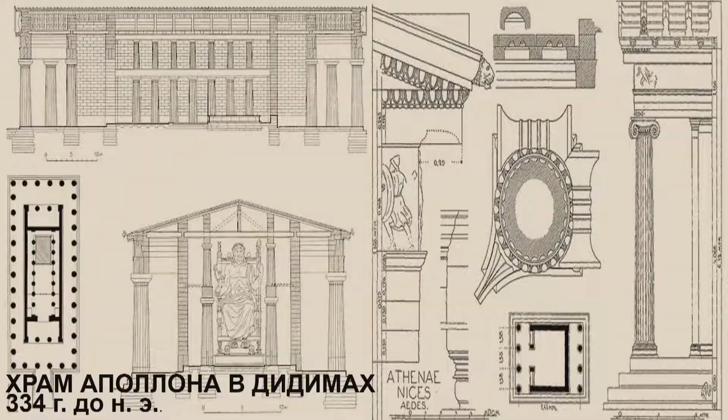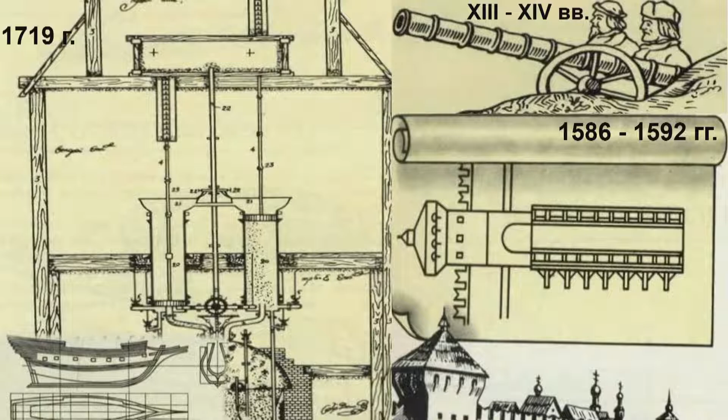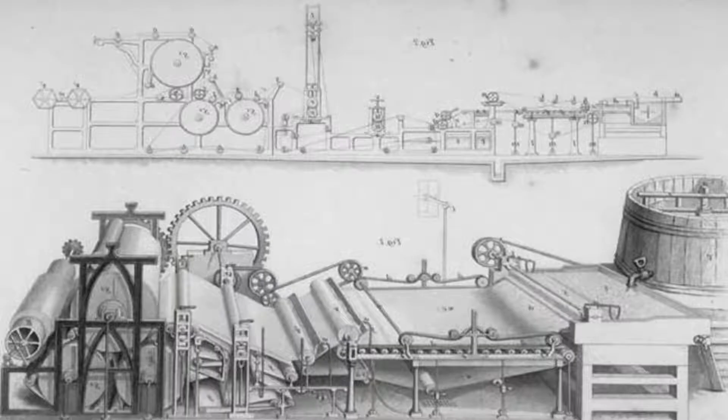But with time, the design documentation was getting more complex, and for the last maybe 500-600 years it hasn't changed much. We can see it's practically the same as our remote ancestors saw them: drawings, sketches, and supplementary documents.

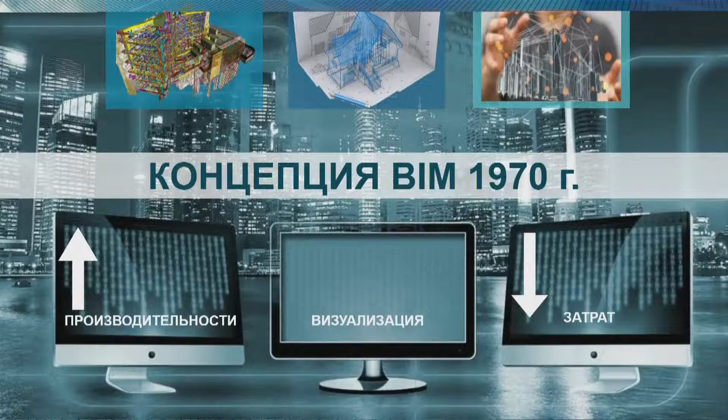So what's then? Construction requires improvement of efficiency. So then the following happened: digital means and computational means, new information mediums were appearing. Ideas popped up: how can we turn project documentation into digital form? And of course the best way would be to scan it, create images, and put it in some computer-based storage. But given all that, one should understand that for construction and design documents, relevant amendments and additions are necessary.

And the first concepts of information modeling started, they were called BIM, in Russian they're called TIM. Charles Eastman is considered to be the discoverer of those concepts. The first one is called BDS, and the other one is called GLIDE. What is the specific feature? Essentially, he took a model of structure building, and he thought: why not make it digital and complement it with various attributes, elements, and documentation?

And thereby we received BIM in its first trial version. Like I said, we needed increasing efficiency in construction because the customer needs the facilities cheaper and with better quality, and therefore it was required to do something about this digital model.

And the modern understanding of BIM has changed, under information modeling, because it's not a model which is implied now, because the model by itself has no advantages for the customers or contractors in construction. Now we understand by BIM the management of the entire project life cycle based on the information available. And of course better practice, better experience allows us to reduce the number of errors and save money for the contractor and customer.

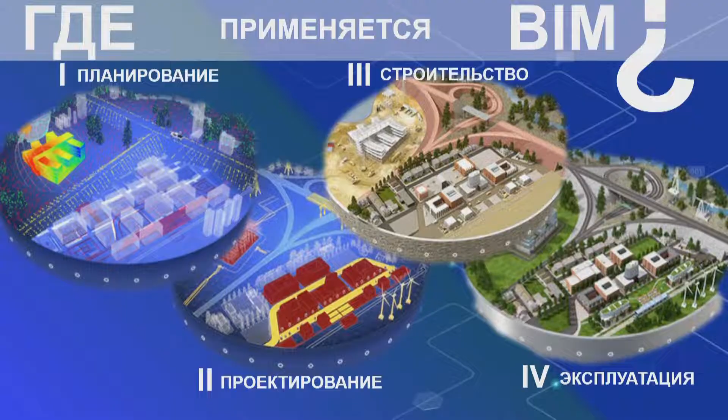And we see that the leading countries are currently developing technologies for information modeling in this or that way. There are leaders, some countries are catching up, and our country is one of the leaders. It's not a catching up country.

And it's not just separate tools, but in the first place it's a standard, because information modeling is a field of knowledge which is quite complex, and it requires a full description of the requirements and role models. And we have a situation whereby there are a lot of different things. We have upper-level standards, which have been described in the ISO 19650 family, but they are either very upper-level or very sector-specific for specific constructed facilities and types of them.

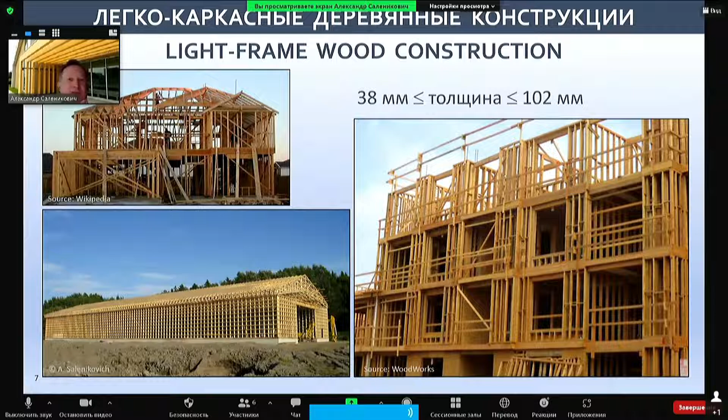Light framework wooden structures consist of materials with small cross sections. This kind of structure can catch fire if there is no fire protection. Also, beam timber constructions consist of beams 14 to 15 centimeters thick, or elements of larger cross sections — these structures are less vulnerable to catching fire.

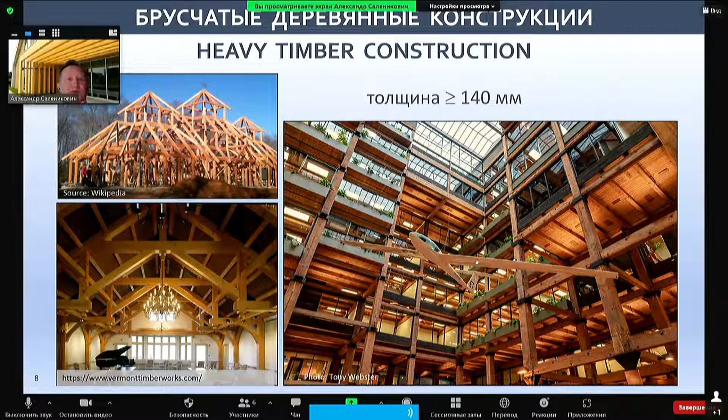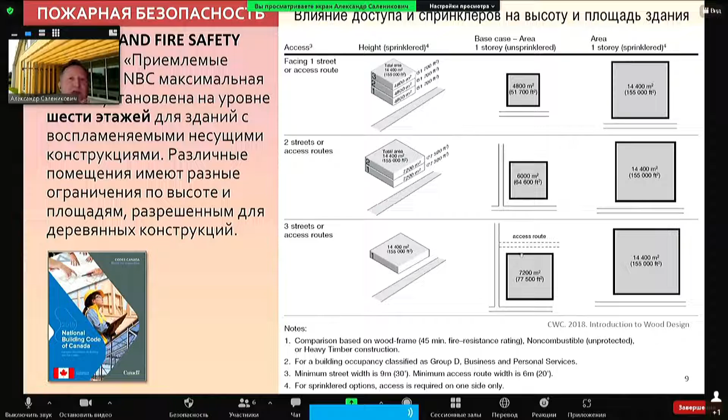Sometimes we see this term — hardly flammable timber construction buildings. But the height of these wooden buildings was limited to 4 stories, and only in 2015 did the number of stories increase to 6, also depending on access to the building — if there's more access from different parts, the height can increase.

Now there are construction code specifications published in Canada and the US that allow use of structural elements now called not beam but massive structures. Within the framework of this new classification in the American construction code, buildings up to 9 floors can be admitted.

For buildings up to 12 stories, as part of open walls, in case of full encapsulation of the wooden elements, the height can be 18 stories up to 82 meters high. As in Canada, you can see the height of the building is limited to 12 stories in case of complete encapsulation of the wooden elements.

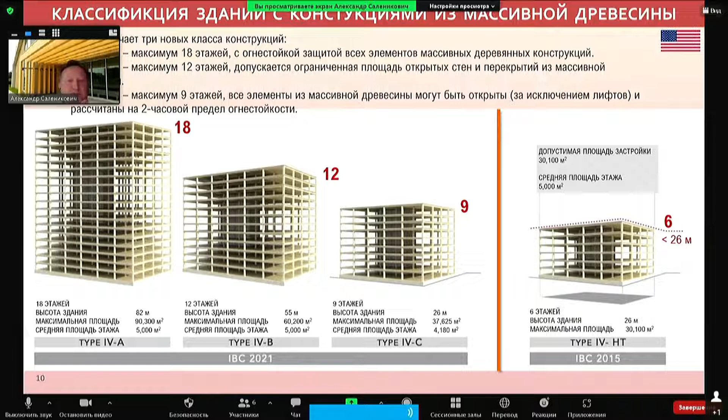A harmonization process is considered. What is massive timber? Let me show it in one slide. Some of them should be well known to you. So for the last 12 years, massive timber use has increased by 5 times in Canada. Canada now allows 1 million cubic meters of these kinds of products, and it's increasing annually.

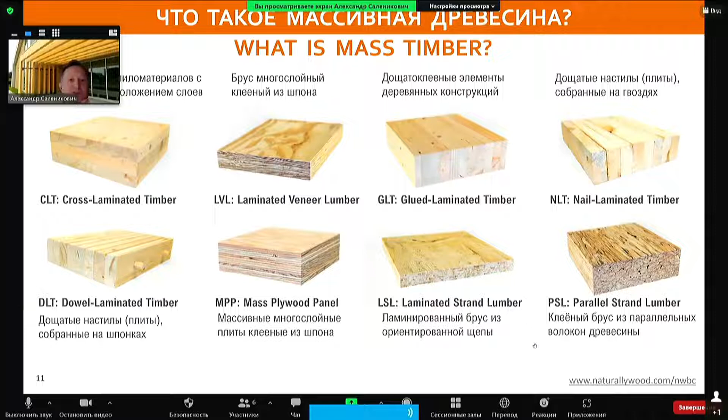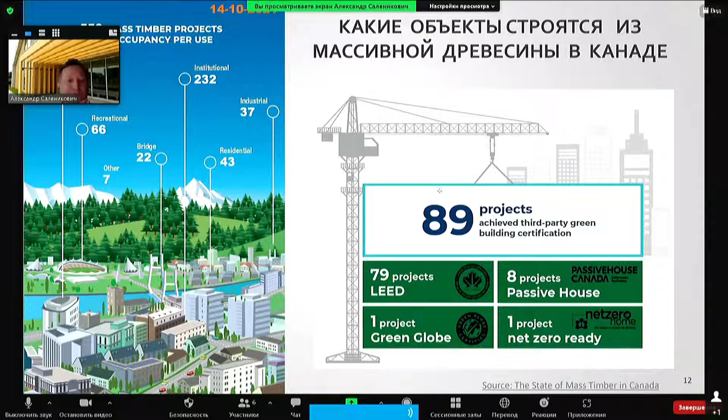It's massive timber, used in buildings of 550 sites, mostly office and commercial buildings. More and more school buildings, and also cultural and entertainment facilities, sports facilities, housing buildings, and bridges and other sites.

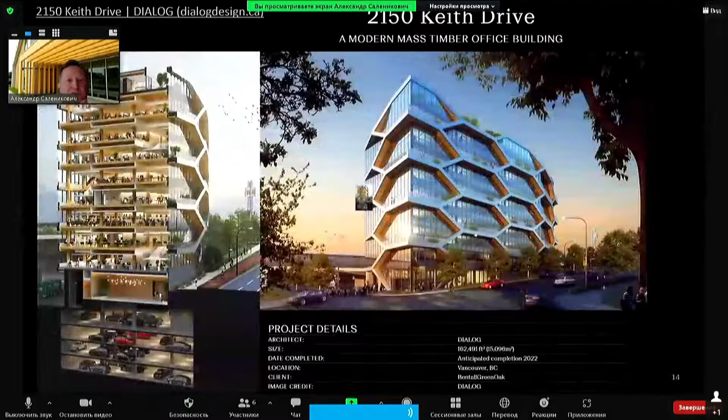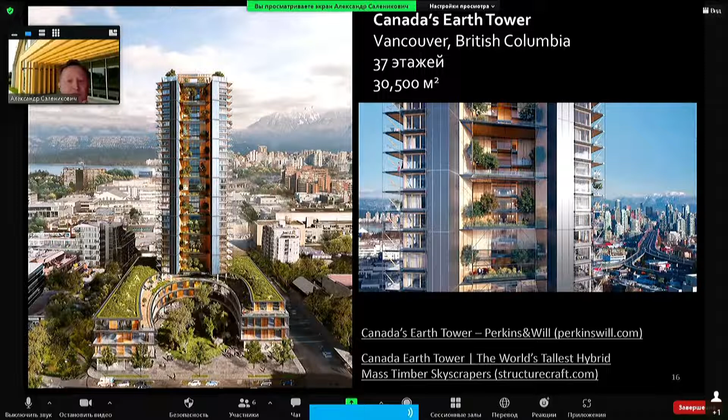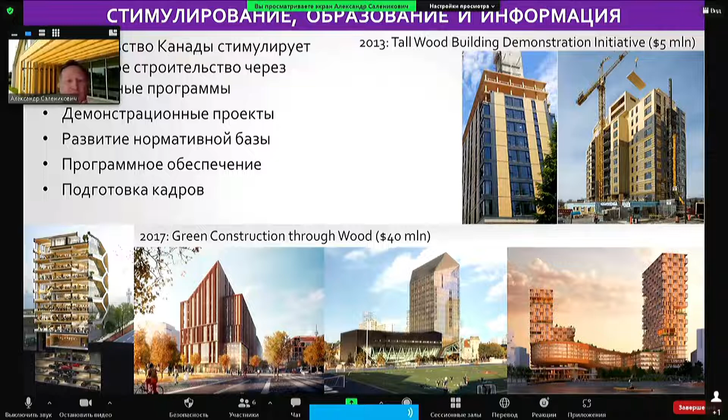Building the sites of informational systems and demonstration facilities. Now we are getting to an important point: how to use the experience that has been accumulated abroad and implement it in practice.

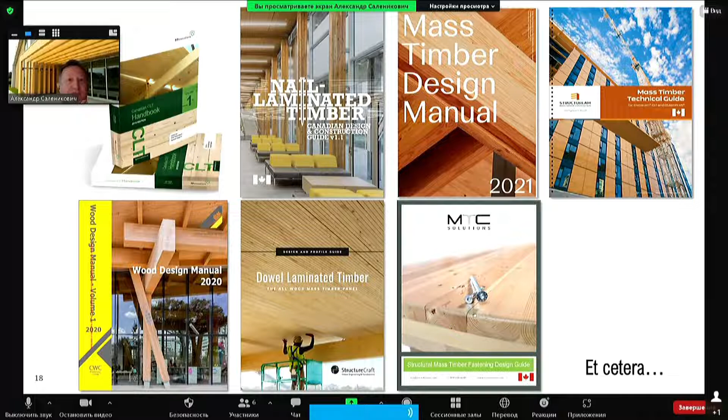A great role is played not only by translation of the text, but also the joint development of documentation. This international ISO organization is in place to help with this. There are 3 official languages for ISO: English, French, and Russian. The number of organizations is stated, and it is supposed to hear all the voices.

How is it implemented? We will give an example of how it goes in reality. It began last year in ISO 59 terminology work, where the first vocabulary was published. It was published in 2 languages, but it may not be the final version.

Why do I say this? Regarding the ISO directives, the actual goals of the organization state that each international standard should be the result of consensus that will meet global requirements. The standard has to be published in at least 2 languages, using the advantage of several languages, especially in practical standards.

Nevertheless, in a recent meeting with ISO Secretariat members, it was said that ISO management doesn't support, and is actually against, 3 languages in all standards because of commercial hardships.

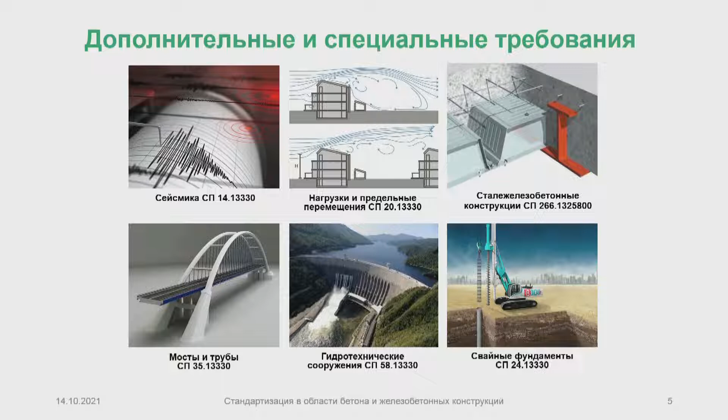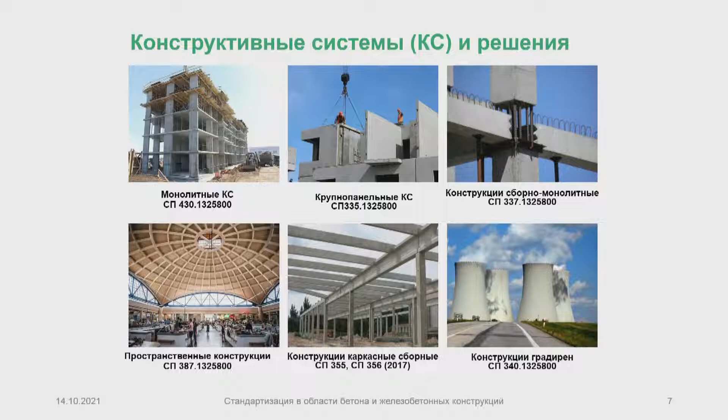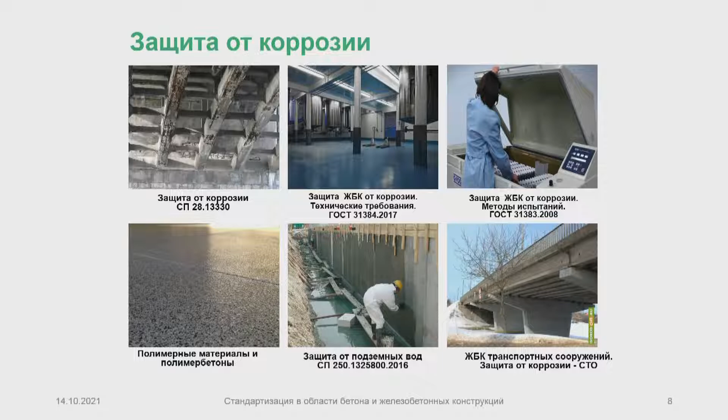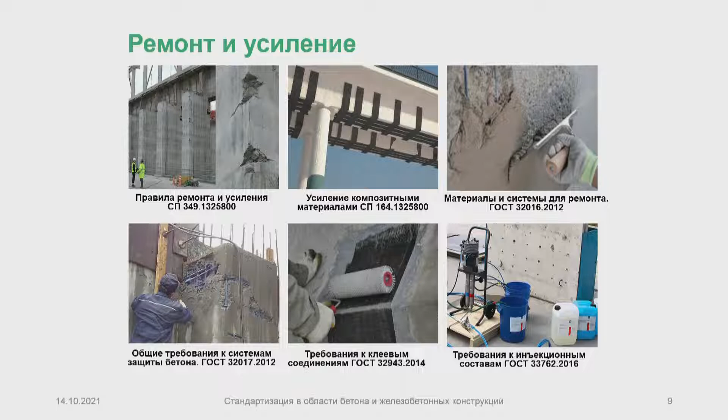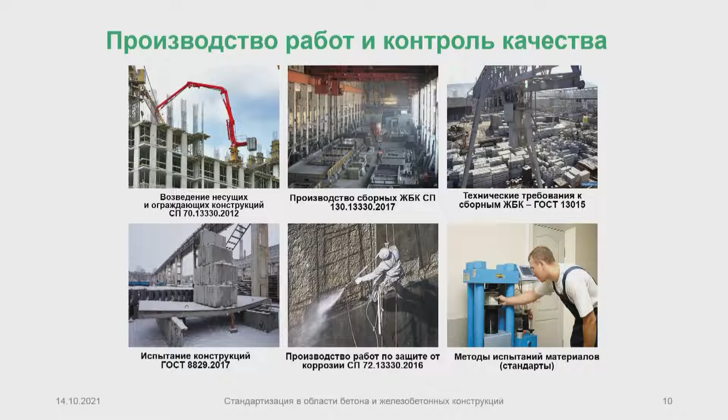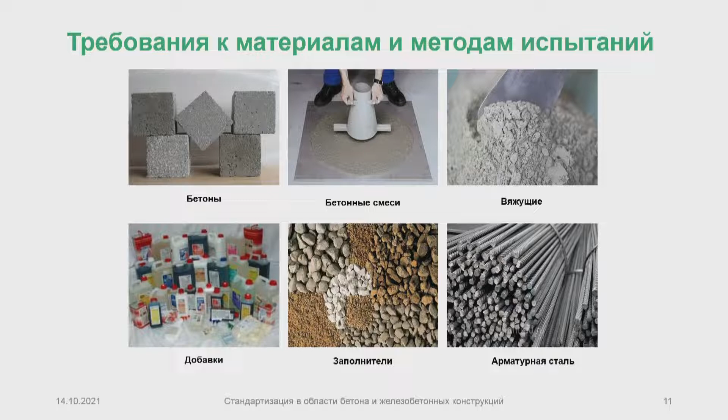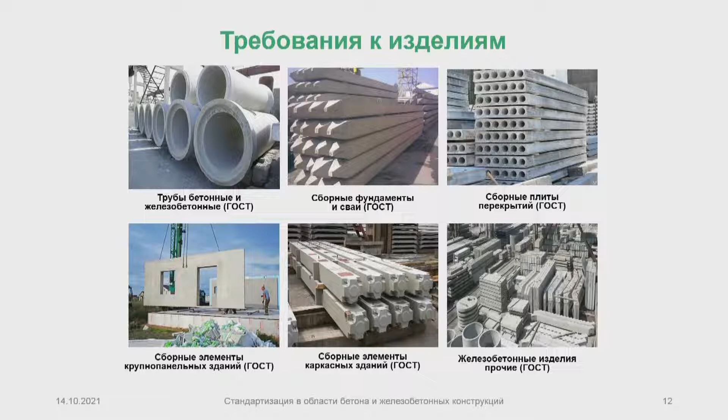I can separately consider a block on construction materials, and another block of national standards with requirements for materials test methods. We speak about concrete mixtures, its components, all kinds of fillers, also reinforcement steel. We've got all requirements for reinforced concrete, its pipes, slabs, and columns. There's a whole set of norm documents for concrete and reinforced concrete.

And what kind of standardization problems have we identified to date for ourselves? There are common problems that we identified back in 2018.

Based on the Reinforced Concrete Association, we've been involved in a dialogue, and we identified the problematics related to standardization. The sectoral coordination program has been identified, and planning of the work for standardization and scientific substantiation of the work has also been touched upon as a topic.

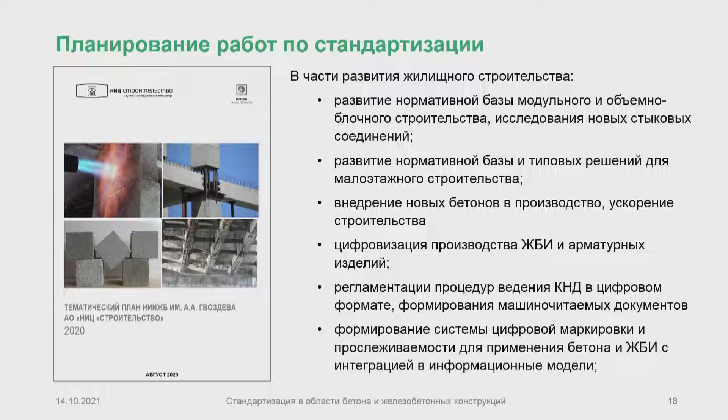Last year we implemented it, and we are developing it now. To summarize those areas, there are many tasks related to new construction materials, construction acceleration technologies, and automation. It's a problem that should be resolved properly, and we should create different coordination councils, as was stated before during this session.

To summarize, I think we are really trying to update the standards and develop the new system, but of course there should be a mechanism accompanying it. This unified electronic platform and coordinating body are necessary, and we can only welcome what has been stated today, and hope that next year it will start working actively.

Also, when it comes to coordination, we should not only coordinate the standardization stage but also work before it. The expert community should be working at an earlier stage; there should perhaps be temporary working groups. There are many comprehensive issues, and I hope they will soon be resolved.

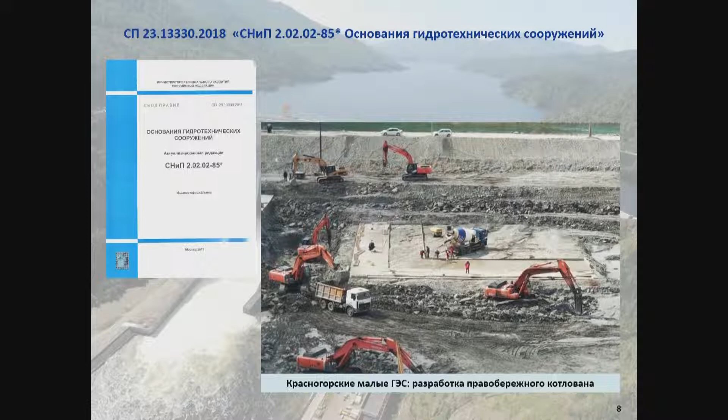There have been modifications that refer to hydrotechnical materials in hydrotechnical construction, describing in detail the rules of their use. There are also two appendices about the performance and quality control of synthetic materials.

This set of rules was derived based on the SNiP, and not only our Institute took part in developing it - the Institute of Arctic and Antarctica and Polytechnic University also jointly considered this set of rules, and we reconsidered the section concerning ice loads.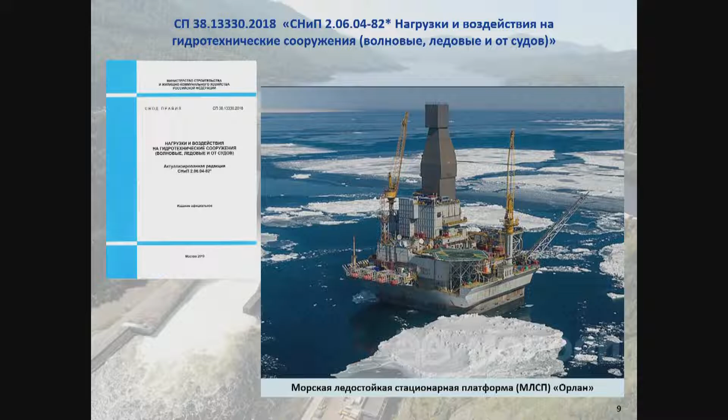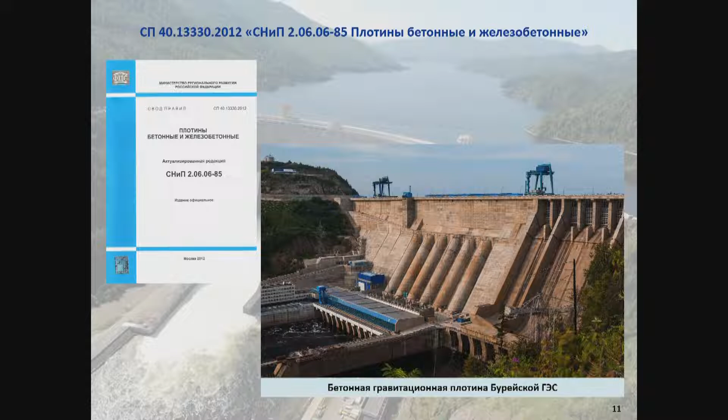One of the appendices relates to dams of construction materials. I'm not going to dwell on concrete and reinforced concrete dams, but there is a separate section dedicated to it - because I'm short of time, I won't dwell on it.

Well, for some reason it's not flipping, it's not moving on. It's a set of rules 58.

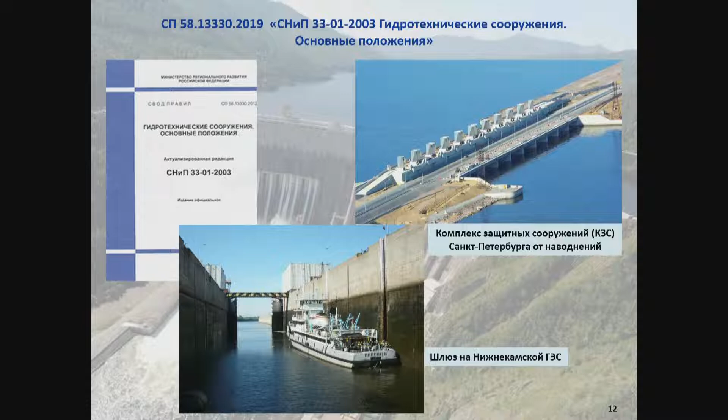It was developed in 2019 and gives actual modification to this - developed as actualization of the Act in SNiPs, construction standards and rules. These didn't exist before.

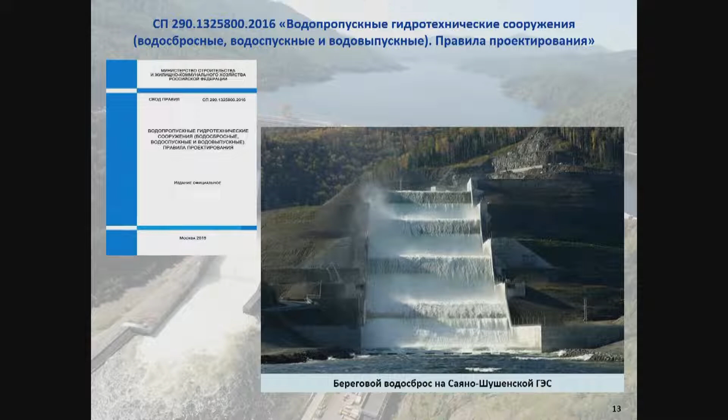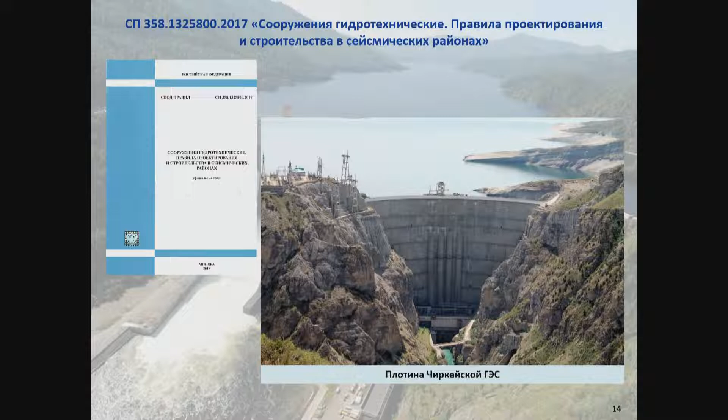And set of rules 290. You can see the pictures of Sayano-Shushenskaya hydropower plant water drain. I'm not going to dwell on it, but it's a very important document because the structure of water throughput facilities provides the reliability of the dam.

It's slid back, it's not coming back. Could we go one step back? Could you help me with that? Yes, the equipment has got tired, it's fatigue at the end of the day.

So this is hydrotechnical structures - a construction for seismic regions. It was developed for 15 years, the first ones.

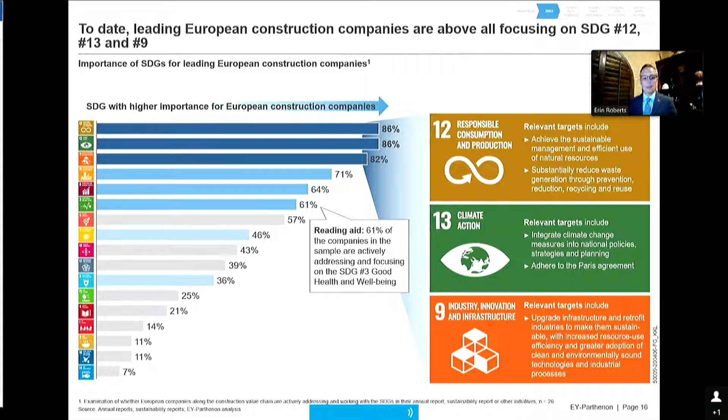86% of the companies we reviewed had a focus on responsible consumption and production. That is, how do they create a set of goals around reducing their own carbon footprint and the carbon footprint of the products and services they provide, which would have a resulting positive impact on climate change, and in the process, upgrading infrastructure and creating a clean and sustainable infrastructure.

As we go on, a lot of these are not surprising. Building sustainable cities and communities that are inclusive, that provide for strong economic growth and good health and well-being, which is clearly today a high priority, and frankly always has been a high priority for engineering and construction companies, given the risks involved in the work that they do.

You'll see that each of these end markets, like suppliers, building products and materials, have various focus areas, and you'll see how each of those companies align to those goals.

But what I wanted to spend just a minute on is those areas where we believe construction and engineering firms can have the highest impact. It runs to these issues of energy transition, resiliency, sustainable cities, resource allocation, and infrastructure development, which can create this new future.

I believe, and I've said this many times, that it is going to be the engineering firms and construction companies that actually physically create our sustainable future, and so they will be the leaders in this. So what we need to do as an industry globally is identify a set of standards that can be applied globally that create these incentives for companies to participate in this global change.

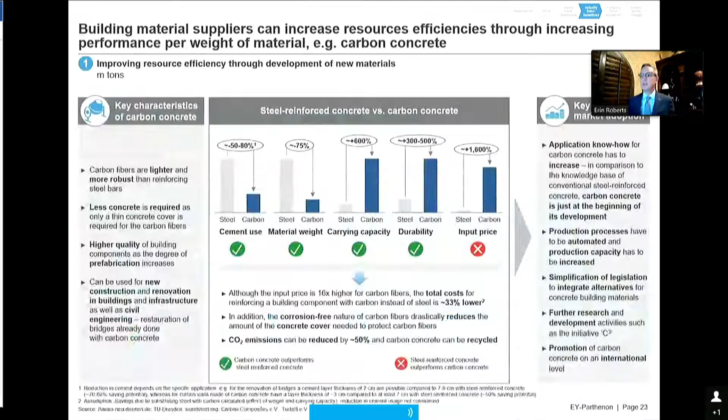When you look at the areas of standardization—and I'm going to flip forward several slides here—the trend is to try to drive these behaviors and use companies across the world who can do these things as the primary means for creating that change.

Meaning you could create regulation, legislation, laws, and so forth in all of these countries around the world to drive behaviors. But we believe it'd be equally as positive if companies and stakeholders around the world created goals for themselves that understood the business imperative and created a strategy that improved their business while achieving these goals.

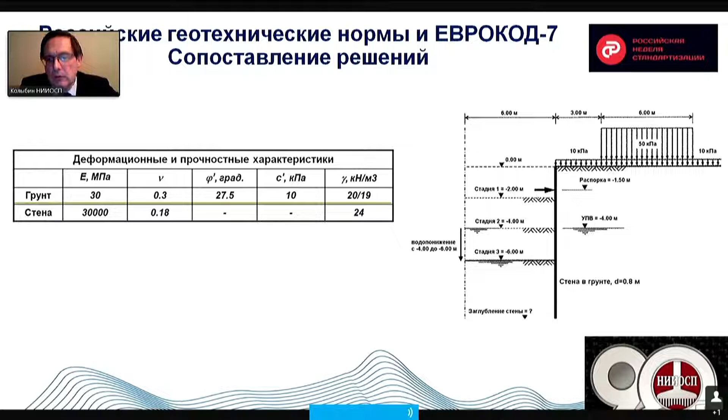There is a 6-meter deep pit with one spacer, and how deep the wall should be. It should have been determined for its sustainability, and what's the strut force.

And so the geotechnical standard setting envisages finalizing the work that we have established and that we have started.

The standard should also envisage supporting the project solutions, and according to law number 384, change the orientation of our standards from manual to numerical calculation methodologies using the Eurocode sites, which have not been reflected in full to sufficient extent yet, and also use the new test and calculation methodologies coming from the construction market, and pay more attention to verification.